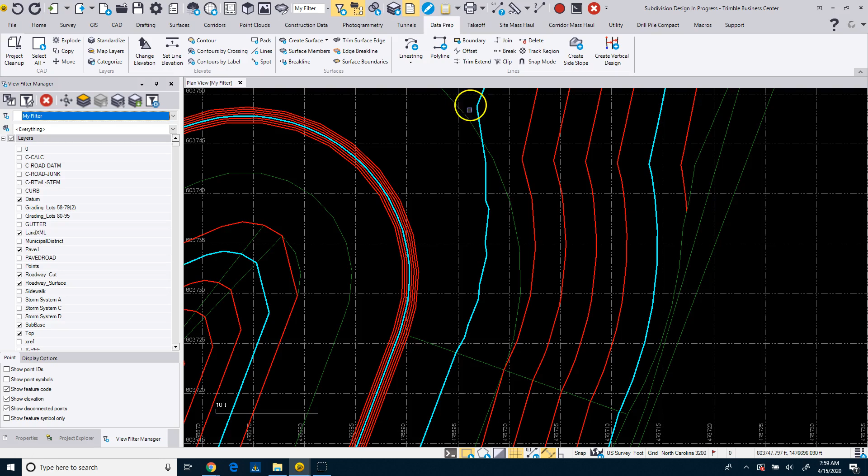All right, so there's a question that came in about cleaning up contour lines or lines that look something like this where they're pretty jagged. There's a tool under data prep and it's using the project cleanup.

Basically under project cleanup, what you would do first of all is select the object, and then I would go to project cleanup. Now, what you can do here is click on current selection and then uncheck everything but this filter line vertices. Now, if you hit F1 and it opens up the help, you can see here, it kind of gives you a little preview.

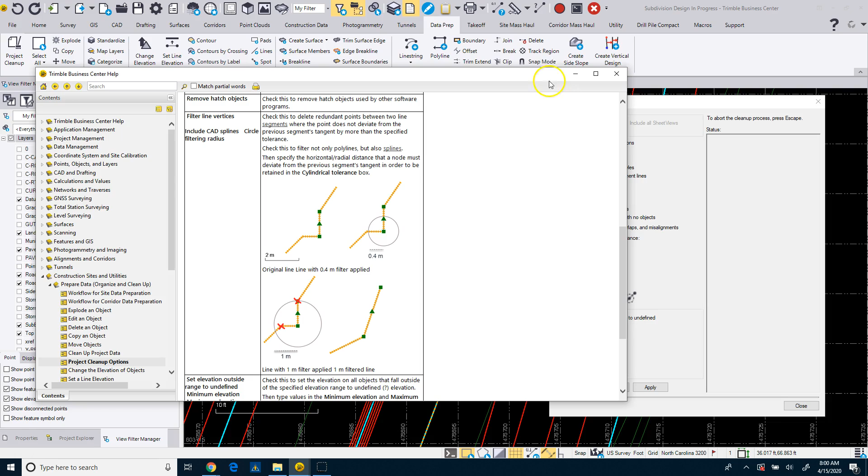So what's going to happen is, based on the tolerance you put in there, it's going to remove some of these vertices. Now, this might be a little bit of trial and error, and I'll show you what happens. So I'm going to do it with 2, and I'm going to click apply. You can see that it kind of really destroys my line a little bit, or at least some of the intent. So it got rid of more than I wanted to.

So I'm going to undo it. I just want to show you the difference of what's going to happen here. So I'll zoom out so you can see the whole thing. So then if I click that line again and I go to project cleanup, this time let's go ahead and set it to like 0.5. Right? So the smaller you set it, the less it'll mess around with any of this other stuff.

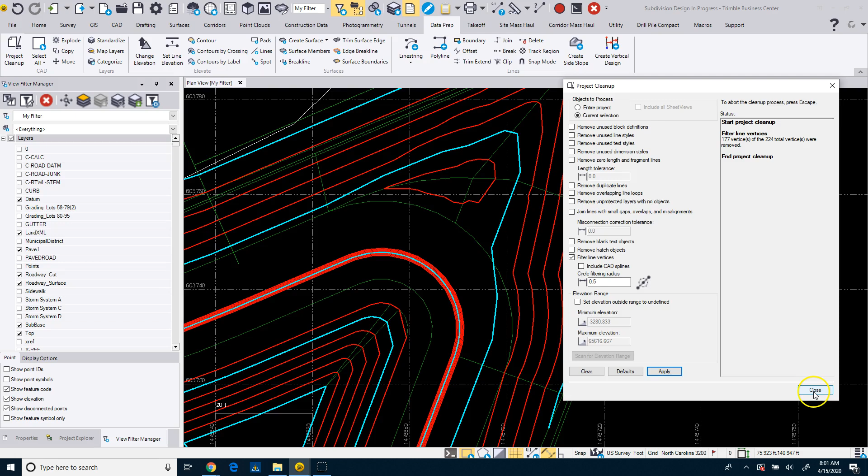Now when I go ahead and I click on apply, you can see that it cleans up some of those vertices in that contour. Now if you wanted to smooth it, make it rounder, then you would have to come in and edit this, and it seems to be a lot more work probably than it's worth, but you could change these to maybe some smooth arcs, and you know, it'll do this one too, right?

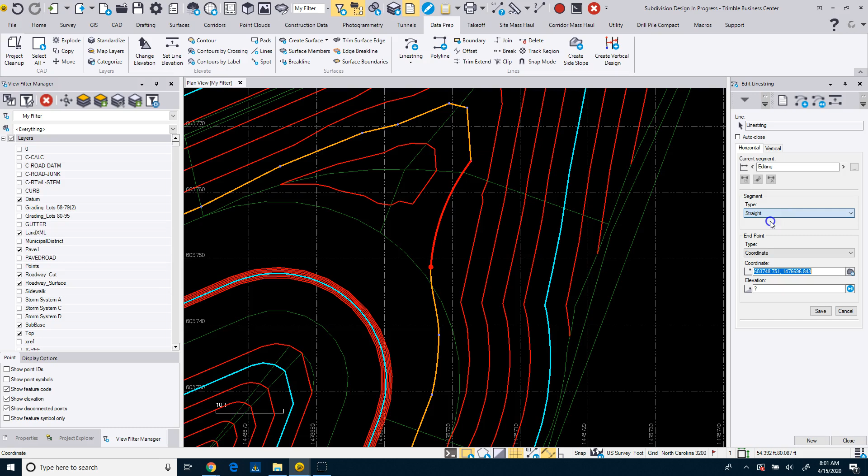Make that a smooth arc, and let's do one more. Or smooth curve. That one, oop, I didn't do it. So smooth curve. There we go. All right, so that one's smooth curve. So you can see I kind of smooth those out. Make that one straight, and there we go. So that's a little bit smoother through there, or insert some more vertex points that you want.

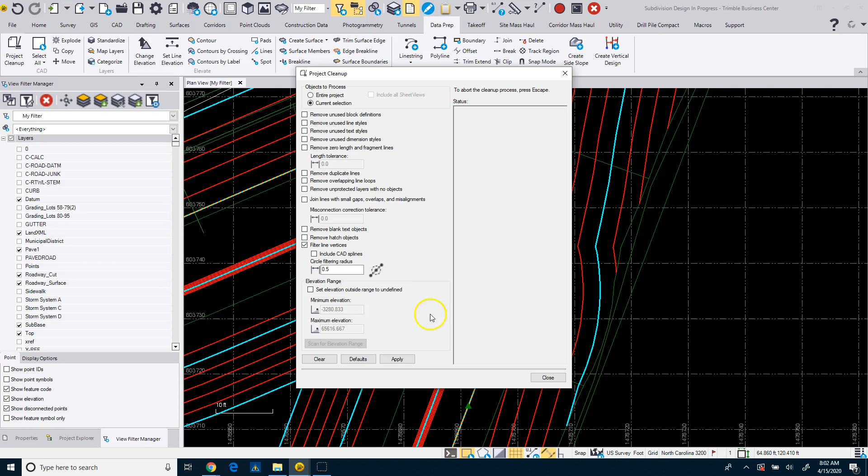But realistically, it's kind of just showing you that filter line vertices based on our project cleanup, and you can clean it up. And if there's splines, you can also click on Include CAD Splines, and it'll apply it. So you can do a group of them at a time. It's just one of those things you got to smooth out.

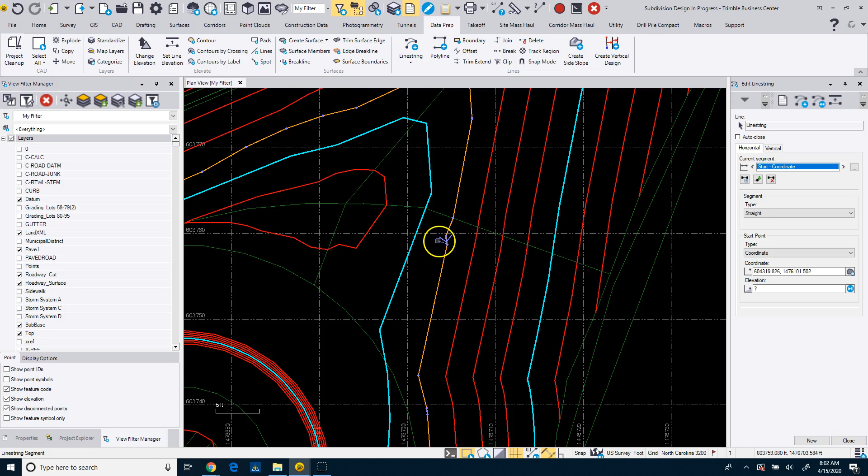The other way to clean that up is to probably just, like I said, maybe break it, and then put a new arc in there the way that you want it to look, following that design intent, and then delete those jagged contour lines through there. But you know, like this one up in here, it's probably just as easy to come in here and edit this guy, and just delete that piece there.

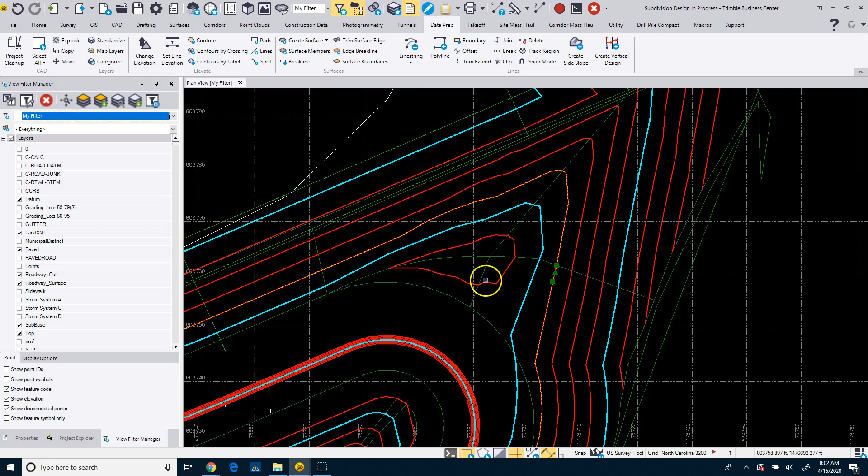Again, it's up to you. I don't know if I would do all that, but like in here too, same thing, right? Does that contour really go that way? You can always do that too. So just different ways of project cleanup, but the filter line vertices would clean it up probably the best.